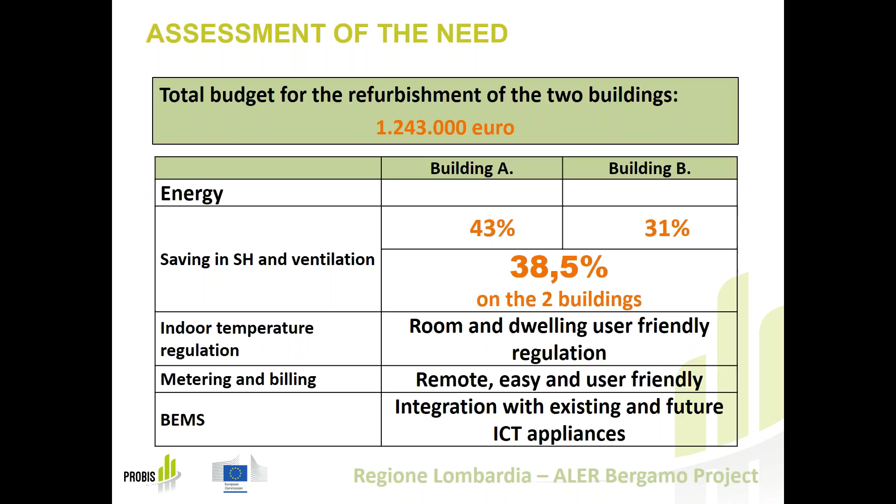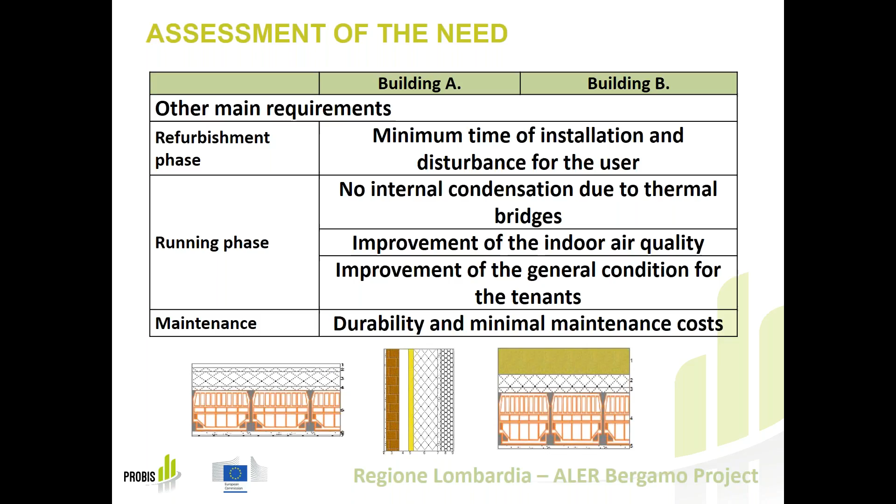Moreover, other kinds of requirements were added. One was the minimum time of installation. This is, for the user, one of the critical points when you make this kind of work on the building. No internal condensation due to thermal bridges, an improvement of the indoor air quality and general conditions for the tenants. And another quite interesting thing is durability and minimum maintenance cost.

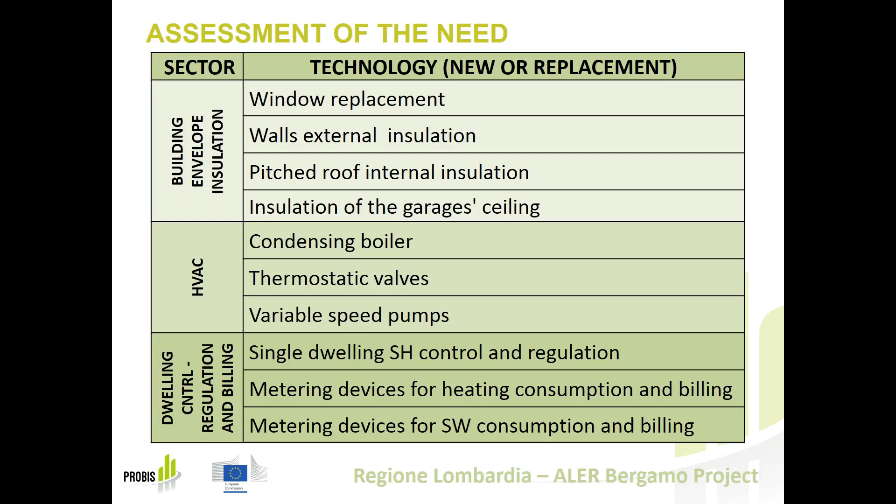If we look at the technology, there have been 3 levels of technology. One on the envelope: window replacement, external insulation, pitched roof internal insulation, and insulation of the garage ceilings. Under the heating system: condensing boiler, thermostatic valves, variable speed pumps. For general control and regulation, a single dwelling space heating controller was required, meter devices for heating consumption in the building, and meter devices for sanitary consumption.

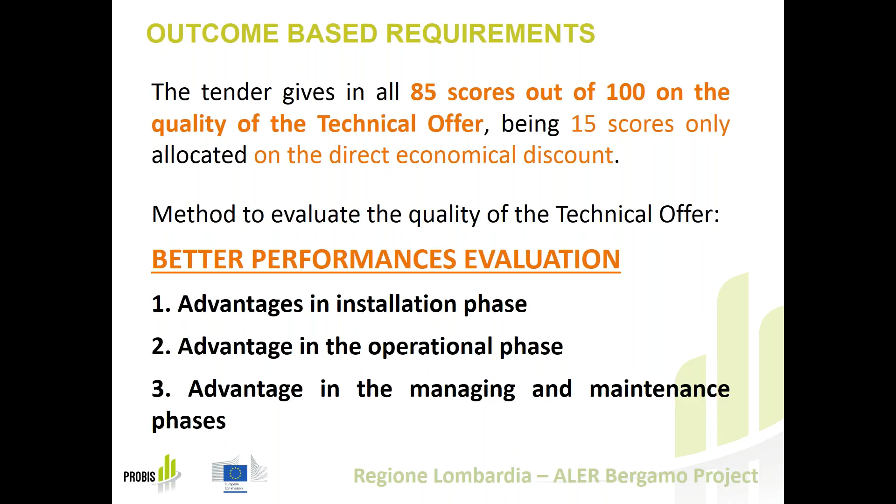The tender evaluation phase has been really full of interesting news due to this kind of innovative tender. First of all, we started with 85 points out of 100 on the quality of the technical offer, and only 15 points were allocated to the direct economic discount. This is probably one of the few times in Italy that this kind of high scoring on the technical offer has been placed. The method was based on performance evaluation only: the advantage in the installation phase, the advantage in the operational phase, and the advantage in the managing and maintenance phase.

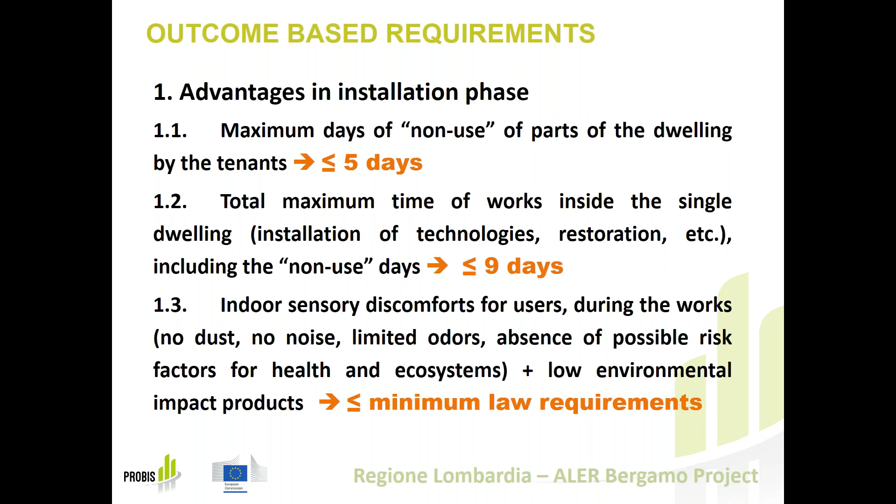In the installation phase, it was required to have less than 5 days of non-use of part of the dwelling by tenants during the work. And in all, the maximum time of work inside any single dwelling had to be less than 9 days. Moreover, competitors were asked to minimize the indoor sensory discomfort for users during the work, so no dust, no noise or limited odors, and the absence of possible risk factors for health and ecosystem. In addition, low environmental impact products were taken into account to increase the scoring.

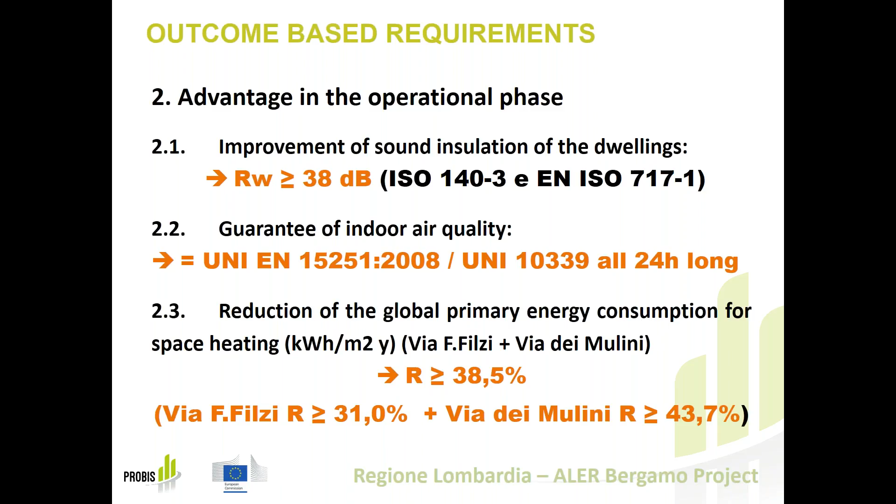From the operational point of view, it was asked to have reduced noise, a guarantee of indoor quality 24 hours long, and a reduction of the global primary energy consumption for space heating in both buildings, as an average, of about 38.5%. We also put some steps in order to guarantee that each building component in any case has a minimum energy quality. So we placed limits for roof, wall, window, and heating system performances.

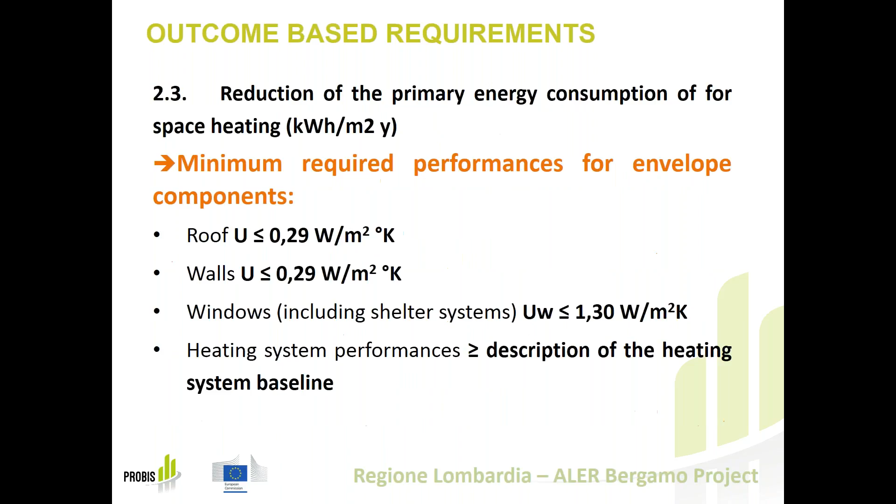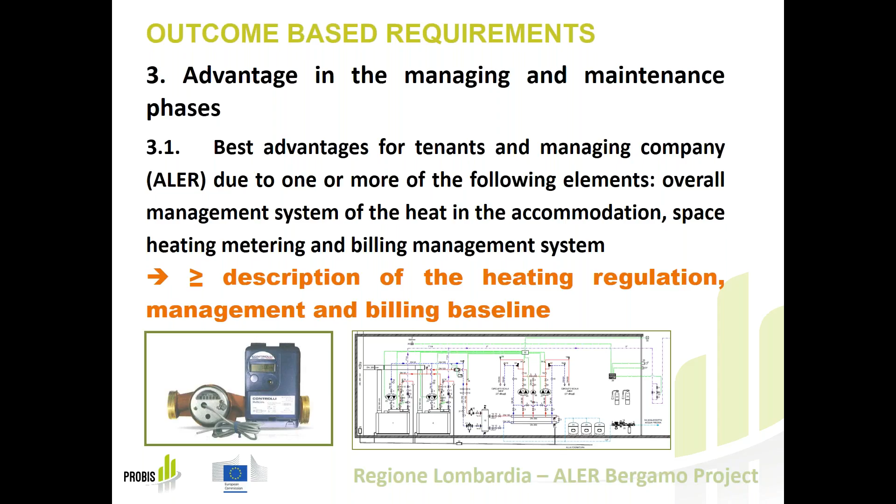And in the managing phase, we described very well the heating system baseline to have a high quality system, and asked them to improve it as much as possible. Then we put as advantages in the managing and maintenance phase a list of minimum guarantees on 7 technologies, with the possibility to add more items, and 3 mandatory components to prove that maintenance and recovery were easy. Of course, it was possible to add more items too.

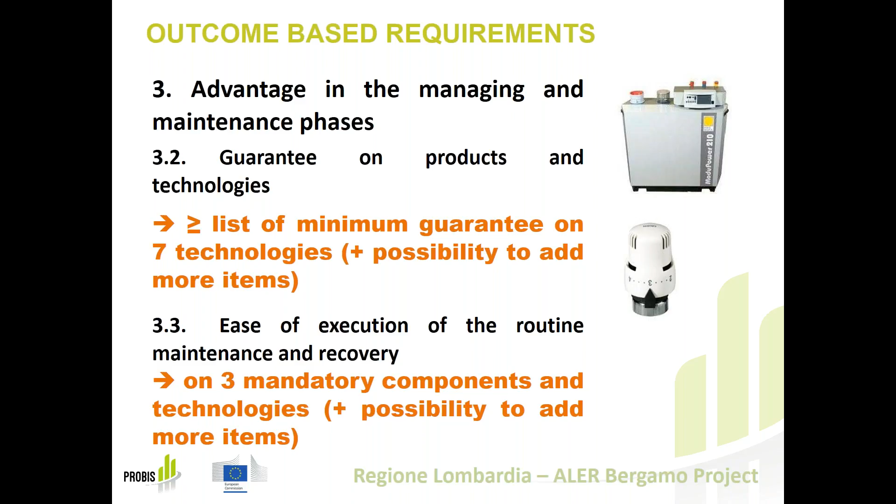One of the peculiar items of this tender is that the baseline for minimum quality was set by description rule in the specification of the tender document. The final drawings were included, as well as an estimated metric computation. So the competitors had a very good baseline that was well proven and used as a reference, even if they were free to use everything they wanted to improve that level.

To be able to compare all the participants at the same level, one single software, free of charge, was adopted - the one used by the Lombardy region to certify energy performance - so that all competitors would have the same result if they used the same kind of value. A copy of the input data had to be attached to the offer.

Result: we are quite proud of the result. 10 offers were submitted, and mostly qualified contractors compete in this kind of special tender based on performance and not on rebate.

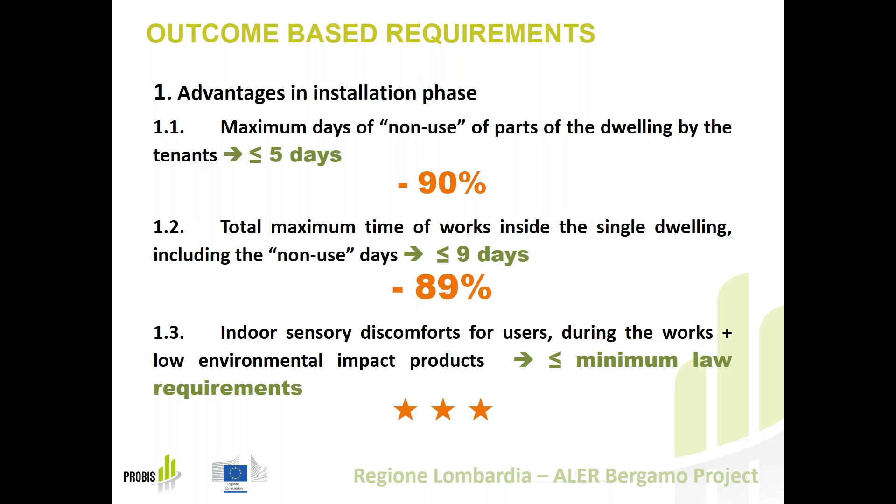They made a very detailed and improved approach to control indoor discomfort and to use low environmental impact products. There has been some improvement in the sound insulation of the dwelling, working on the windows replacement.

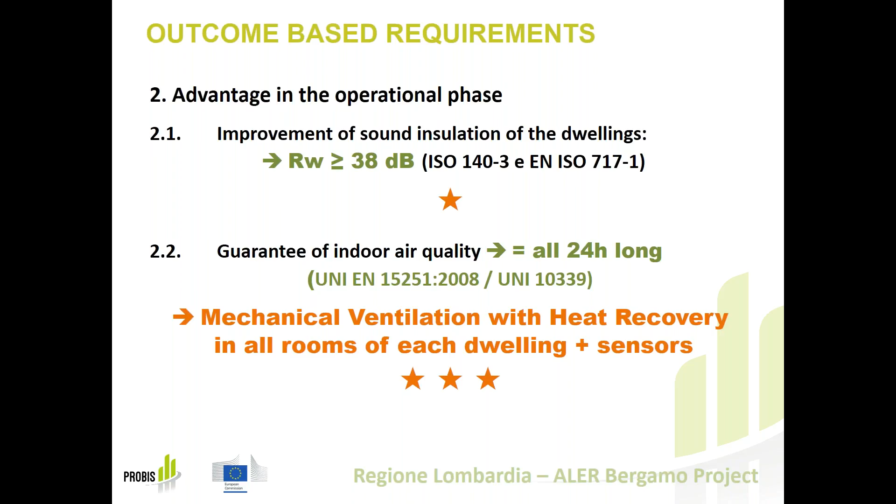One important point is that mechanical ventilation with heat recovery in all rooms of each dwelling, with sensor-controlled fans, will be installed. This was not included in the baseline cost of the project, so it's a really important plus that the project gets from this kind of tender.

On the other side, another very important issue is that the energy saving rises from 38.5% to 65%, with a total cost of intervention of less than 12,000 euro per dwelling.

Another advantage in the maintenance management phase is that a very interesting and controlled system for heating regulation, management and billing baseline was offered.

Under the guarantee point of view, 60% of these 7 technologies raise the minimum guarantee from 5 years to 10 years, which is a very interesting safety factor for the area, because the guarantee was doubled.

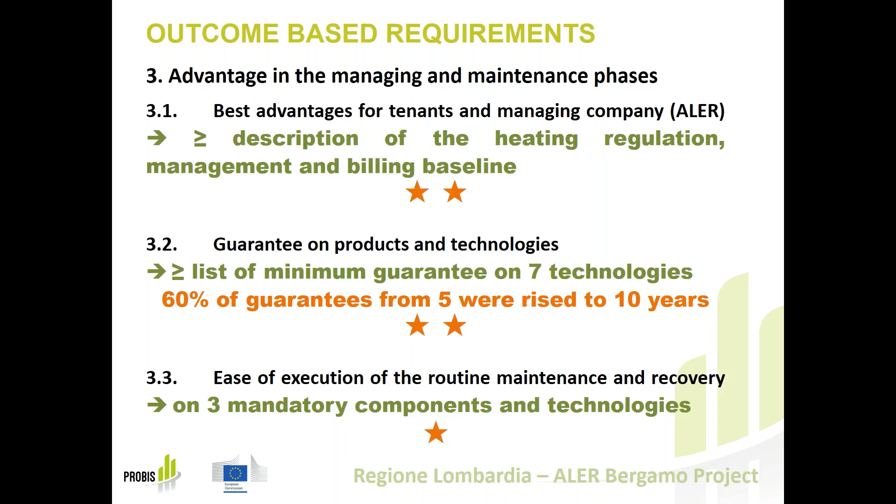On the other side, for these 3 mandatory component technologies, the system to replace and the time needed to carry out all the maintenance on this component was well described.

As an innovative solution, we can show this thin insulation for special purposes - aerogel produced with nanoparticles - that was used for the ceiling of the garages, because there is very little space to put insulation.

The mechanical ventilation with heat recovery has a very sophisticated control system. There's single dwelling sanitary and space heating control and regulation, and a metering device for heating consumption in the building. Both use electronics and a wireless system to collect and process building data.

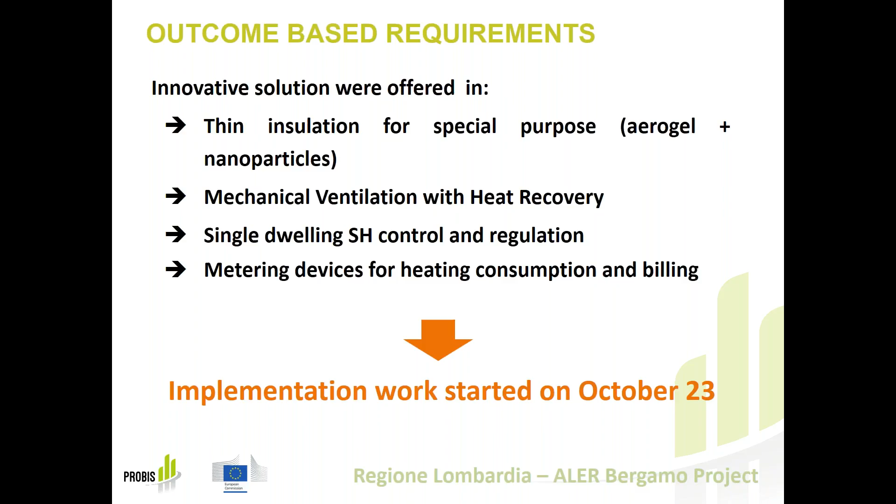And at this moment, the works are ongoing, because they started on site on October the 23rd. Thank you for your attention.